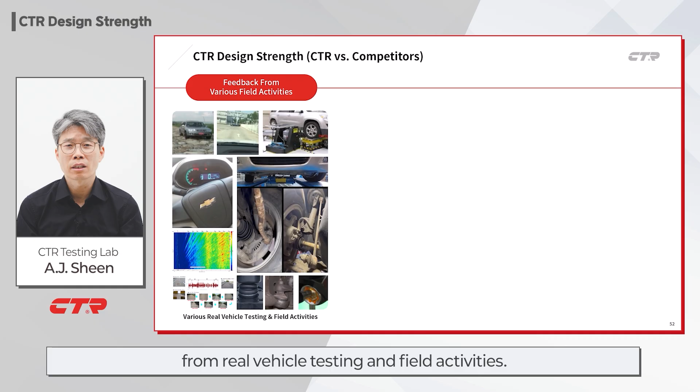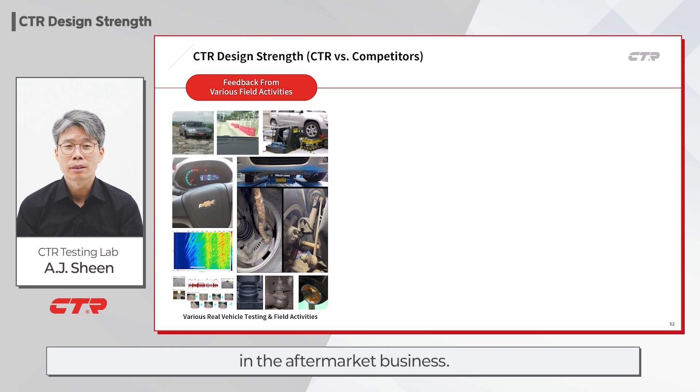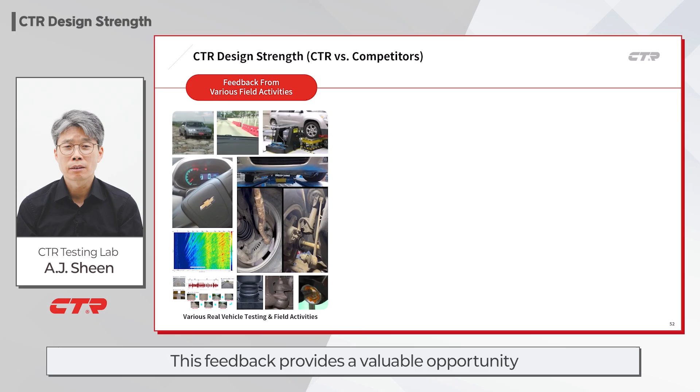The first benefit is feedback from real vehicle testing and field activities. These are conducted on such a large scale that it's challenging for a single component company in the aftermarket business - it costs an arm and a leg. However, this feedback enables practical improvements, providing a valuable opportunity to enhance ball joint design, manufacturing processes, and quality management systems.

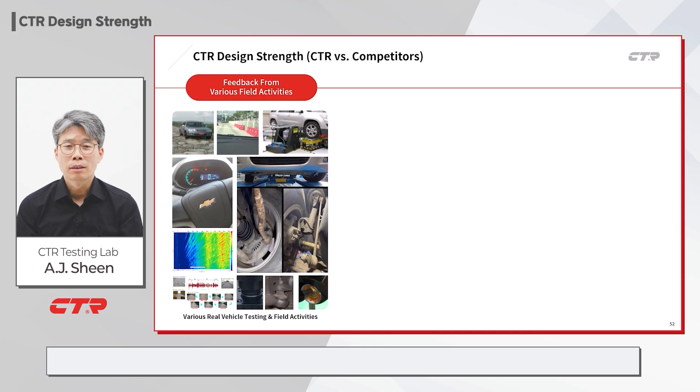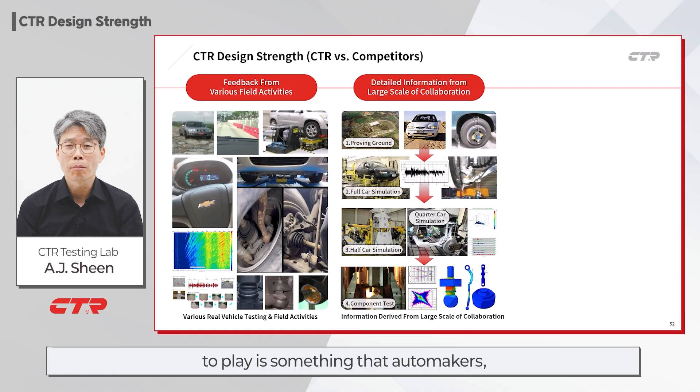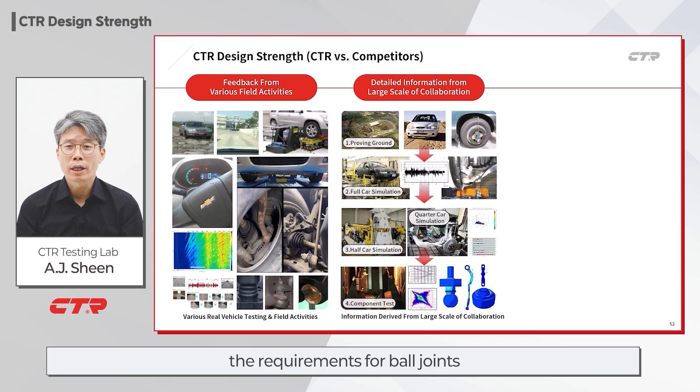The second benefit is access to detailed ball joint information from larger scale collaboration. As you know, a vehicle is made up of more than tens of thousands of components, and the ball joint is just one of these parts. Understanding the information and requirements that a ball joint receives, and the role it needs to play, is something automakers, Tier 1, Tier 2, and Tier 3 suppliers work on collaboratively. Through this large-scale collaboration and research, the requirements for ball joints become highly precise, leaving no room for gaps.

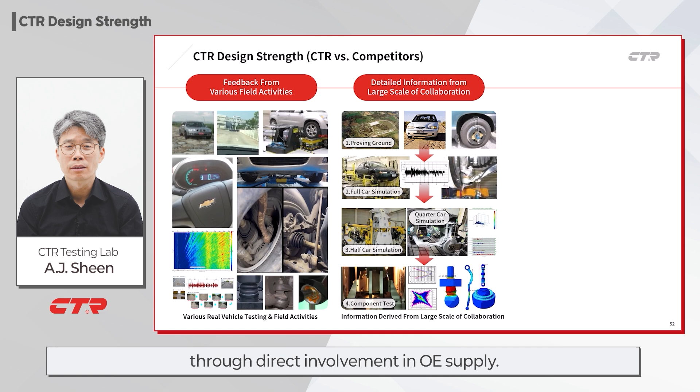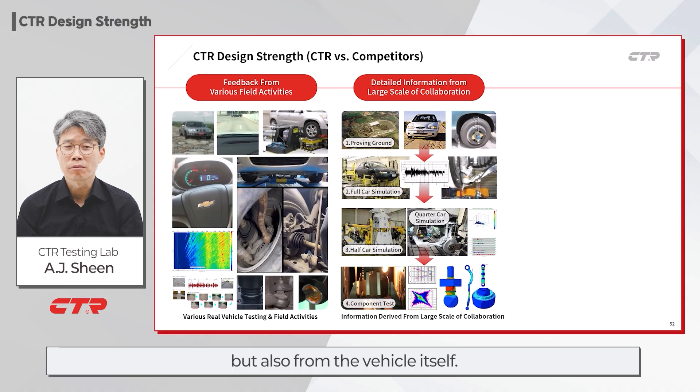Certain insights can only be gained through direct involvement in OE supply. It's very critical to understand every single word and requirement from A to Z, not only from the suspension system, but also from the vehicle itself. I don't think this is something a single component company can handle on its own in the aftermarket business.

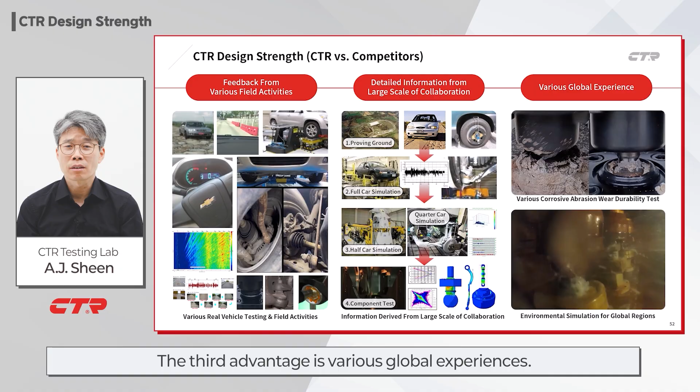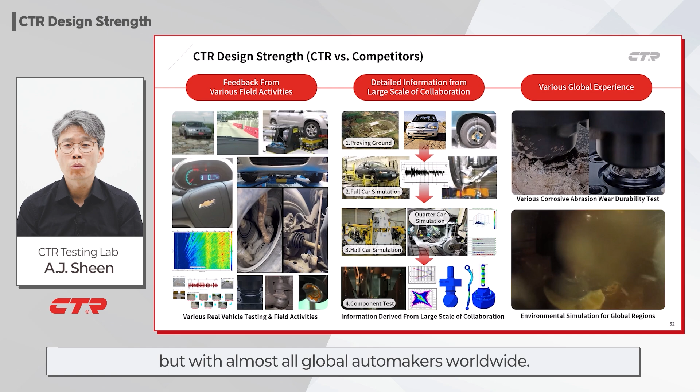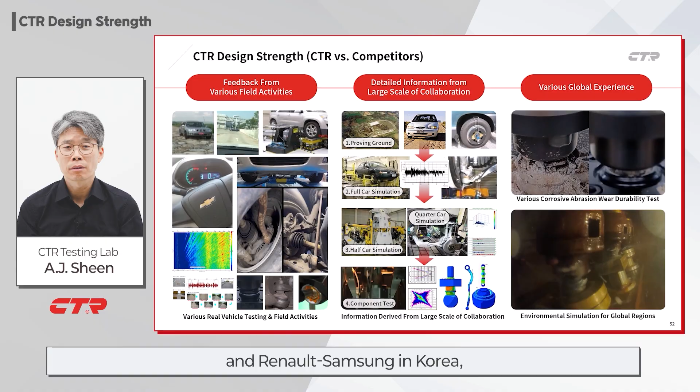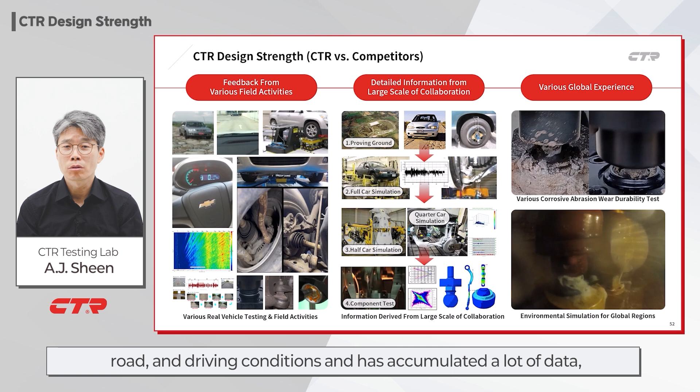The third advantage is various global experience. CTR has been supplying ball joints and working not just with one or two automakers, but with almost all global automakers worldwide. For example, GM, Ford, Chrysler, Tesla, and Lucid in North America; BMW, Daimler, Land Rover, Jaguar, Renault, Fiat, Peugeot, and others in Europe; Hyundai Motor, Kia Motor, KG Mobility, and Renault-Samsung in Korea, as well as some Japanese and Chinese automakers. CTR has encountered various environmental, road, and driving conditions, and has accumulated a lot of data, knowledge, and experience from these - allowing us to create a kind of Bible for ball joints.

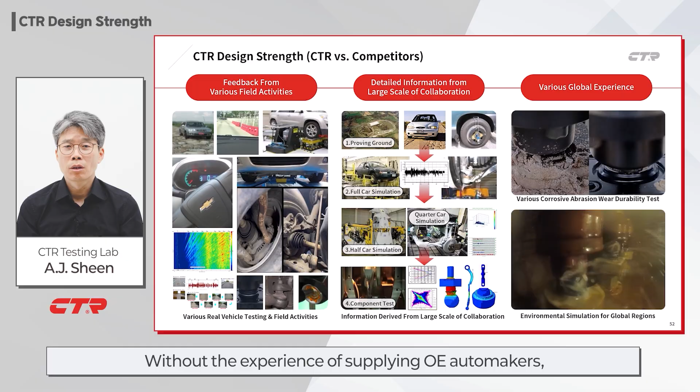Without the experience of supplying OE automakers, it would be challenging for a single component company to handle all these tasks on its own in the aftermarket business.

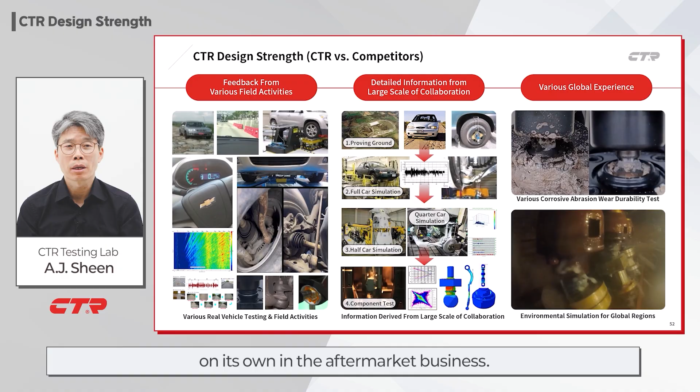According to the survey, the customer's second most popular technical interest is counterfeit parts. We don't have complete information about all counterfeit parts in the world, though we had a couple of chances to inspect them last year. Due to insufficient data, we cannot say all counterfeit parts have the same issues, but the ones we have investigated have some critical problems like this.

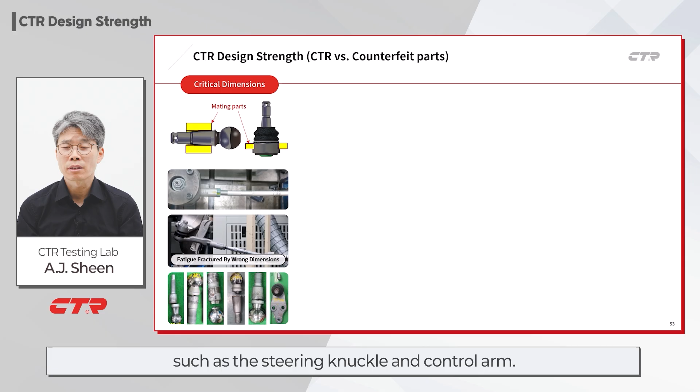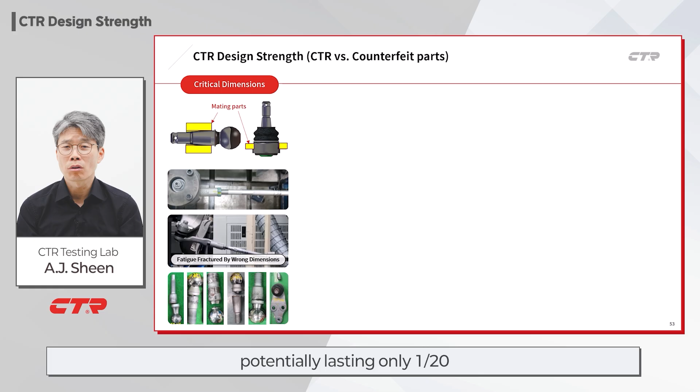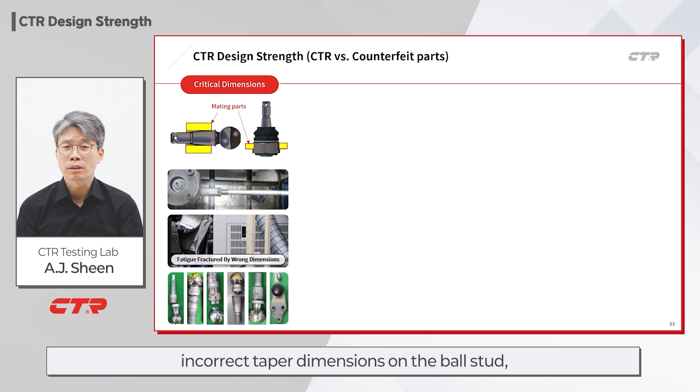The first issue is significant differences in critical dimensions. Some dimensions on the ball joint are very important - for example, taper dimensions on the ball stud and certain dimensions on the ball joint housing are in direct contact with mating parts, such as the steering knuckle and the control arm. If these dimensions do not meet specifications based on the original car's requirements, the ball joint's lifespan will dramatically fall short of expectations, potentially lasting only 1/20th to 1/10th of the intended warranty period. We found that some counterfeit parts had incorrect taper dimensions on the ball stud, leading to a fatigue life that was 1/20th of the required durability.

The second issue relates to the basic performance of the ball joint. As you know, the ball joint is a crucial component of the steering and suspension system, and this system requires the ball joint to provide an appropriate operating angle.

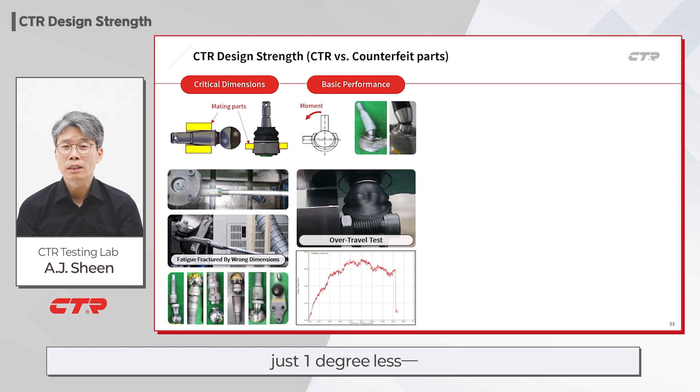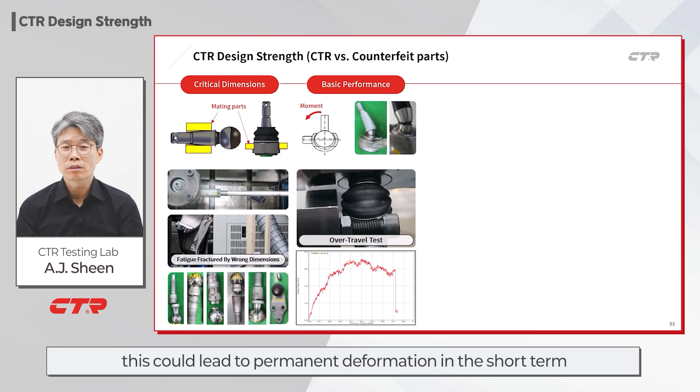For example, if the system required a 28-degree tilting angle, but the ball joint only allows 27 degrees, just 1 degree short, the ball stud could repeatedly come into contact with the housing. Under repeated maximum driving conditions, this could lead to permanent deformation in the short term or even breakage in the long term. This can result not only in a decline in vehicle performance, but also in serious safety accidents. But the problem is that most people don't know how many degrees of tilting angle their vehicle requires.

The third issue is structural strength. The ball joint is installed between the steering knuckle and the suspension system. It is designed to transfer loads from the steering knuckle to the suspension system. However, if the ball joint does not have sufficient structural strength to withstand the actual load from the knuckle, it can become permanently deformed, break, or even separate from the vehicle in a short period of time.

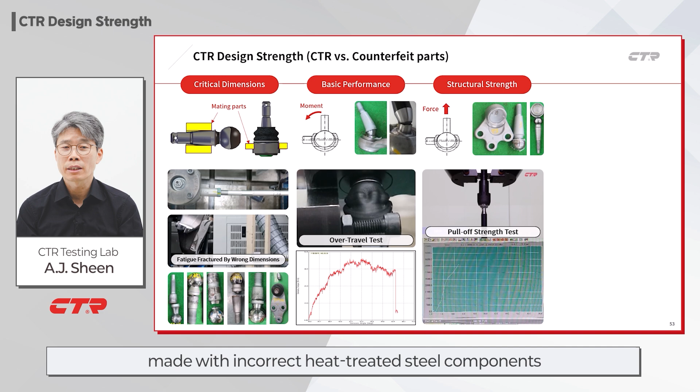We found that some counterfeit parts were made with incorrect heat-treated steel components, or even had the heat treatment removed. This means these counterfeit parts have significantly lower structural strength compared to the original parts, potentially compromising vehicle safety.

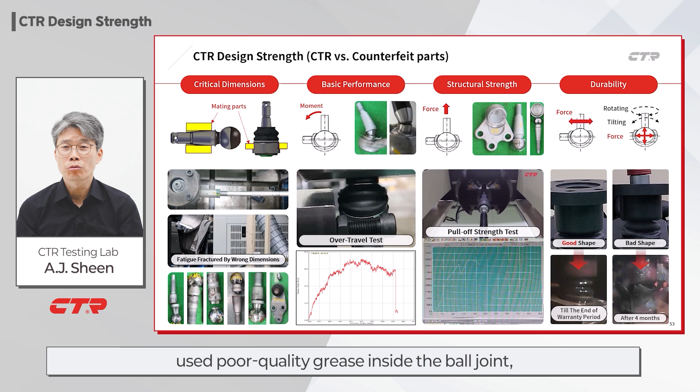The fourth issue is durability, such as abrasion wear durability, fatigue durability, sealing boot durability, and corrosion resistance. In fact, some counterfeit parts use poor quality grease inside the ball joint, leading to a shorter lifespan.

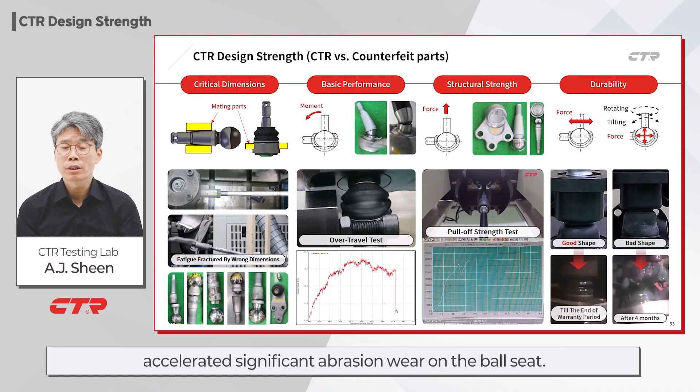Additionally, the rough surface finish of the ball accelerates significant abrasion wear on the ball seat. Steel materials with high impurity content were used, resulting in a reduction in fatigue life. The sealing boot was made from incorrect rubber material or had a poor design, allowing contaminants to enter the joint in a short period. Furthermore, some critical components had insufficient corrosion-resistant coatings, significantly reducing the expected lifespan of the ball joint.

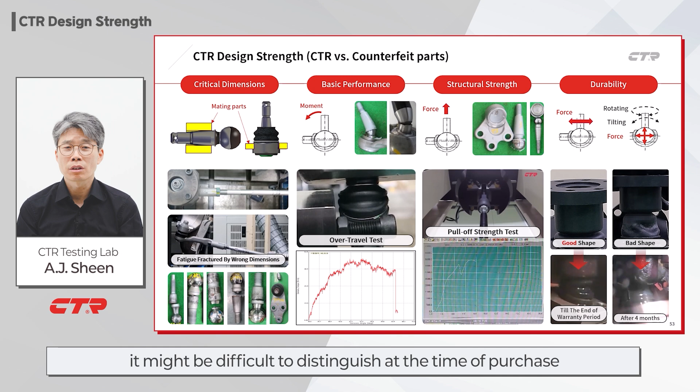So what I just mentioned here, significant differences in critical dimensions, basic performance, structural strength, and durability, are very critical when selecting a ball joint, especially in terms of safety and durability. However, from a customer's perspective, it might be difficult to distinguish whether or not the ball joint has these issues without professional inspection.

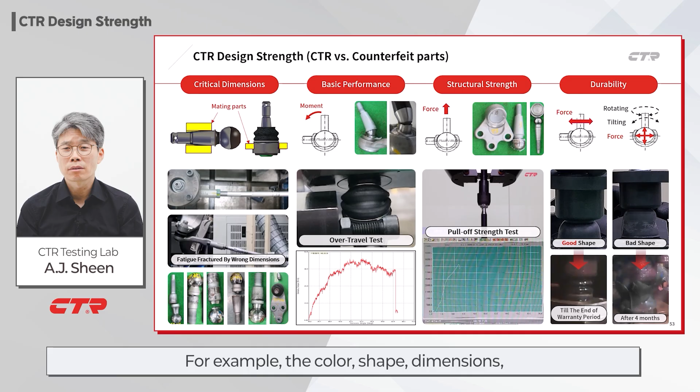Recent counterfeit parts have reached a level where it is extremely difficult to distinguish them from genuine parts based only on appearance. For example, the color, shape, dimensions, and packaging box are almost identical to CTR genuine parts, making it hard for even experts to identify them at a glance. Many of these counterfeit parts are so authentic looking that even experts cannot tell the difference at a glance.

That's why we need to come up with effective countermeasures for this issue.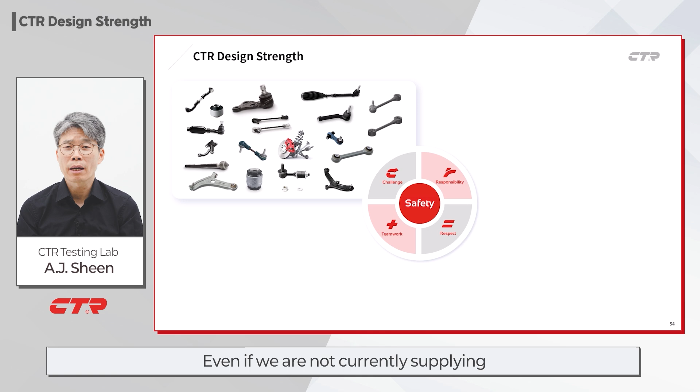So far, I've talked about the strength of CTR's design. To briefly summarize, the strength of CTR's design ultimately comes from our extensive experience gained through supplying to global automakers worldwide. Even if we are not currently supplying ball joints to a particular global automaker or specific car model, it's not an issue.

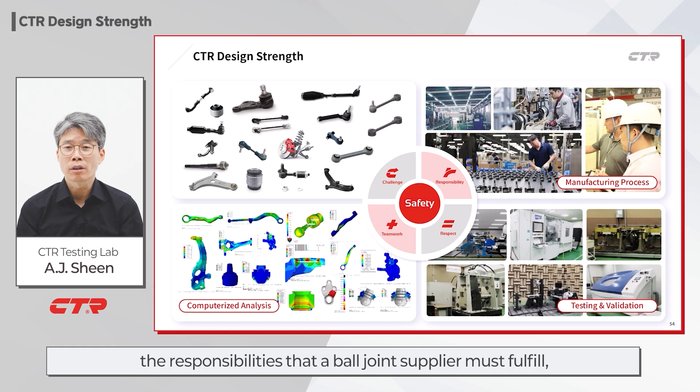We have comprehensive knowledge in nearly all aspects, including design, testing, production, and quality management systems. For example, we clearly understand which design factors need to be reviewed in advance, what tests must be carried out, which materials should be used, how to manage suppliers, and what inspection processes are required. We also have a clear understanding of what global automakers expect, the responsibility a ball joint supplier must fulfill, and the global trend in ball joint technology.

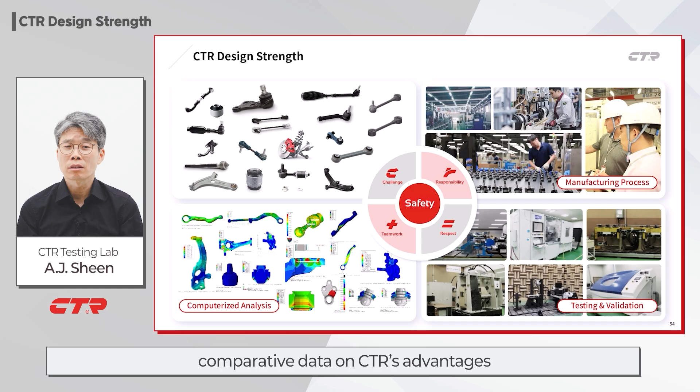Due to time constraints, I was only able to provide a brief overview of the topics covered in this session. However, in the next seminar, I will present more detailed data and test results comparing CTR products with competitors and counterfeit parts, which are topics we've seen the most technical interest in. Then you might be able to see detailed comparative data on CTR's advantages over competitors without prior experience, and the specific potential issues of counterfeit parts.